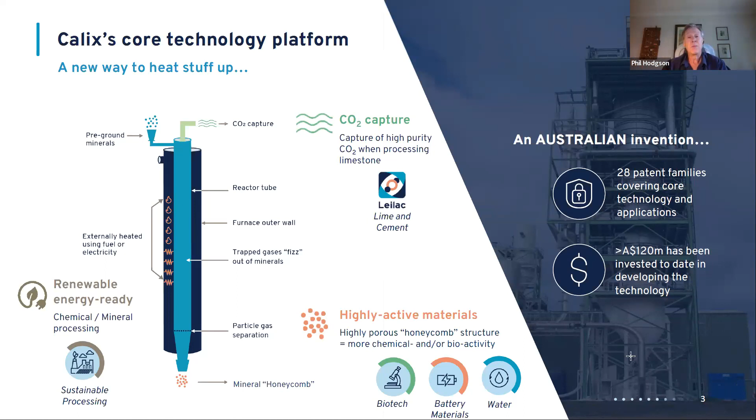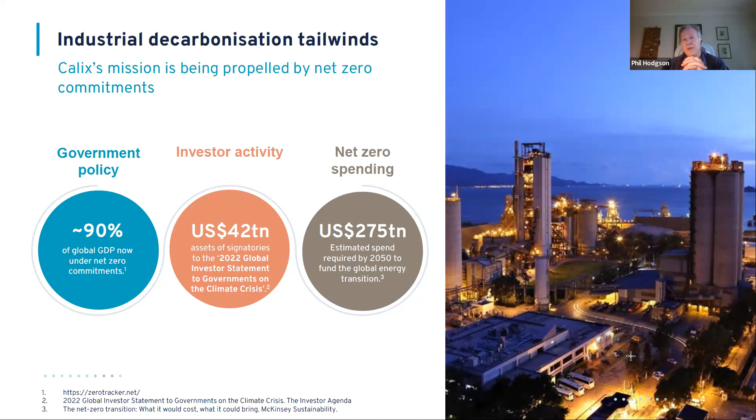And in terms of the applications, all of the ones that we're developing are really powered, if you like, with some pretty strong tailwinds around ESG and industrial decarbonisation. Just a couple of stats here on policy and activity and spending that's needing to go into decarbonisation over the course of the next decades. And they're just staggering sums. And so industrial decarbonisation is a great space to be right now.

If we have a look, just a few jurisdictions as well across Europe and the US and Australia, even in just the very recent announcements a couple of weekends ago, the US-Australia Climate, Critical Minerals and Clean Energy Transformation Compact, which is basically going to allow Australia to be seen as a domestic supplier in the US.

Details still to emerge, but the Inflation Reduction Act is a huge US activity that is giving funding and support to decarbonisation. And the ability of Australia to be under that umbrella is going to open up enormous opportunities here and obviously in the US as well.

Of course, Europe, very important also. Our pilot project in cement and lime is in Europe. They've led the way to some extent with the European Emissions Trading Scheme and what's going to be called the Carbon Border Adjustment Mechanism, where a tariff is effectively placed upon CO2 on products. Again, just another tailwind for a technology like ours.

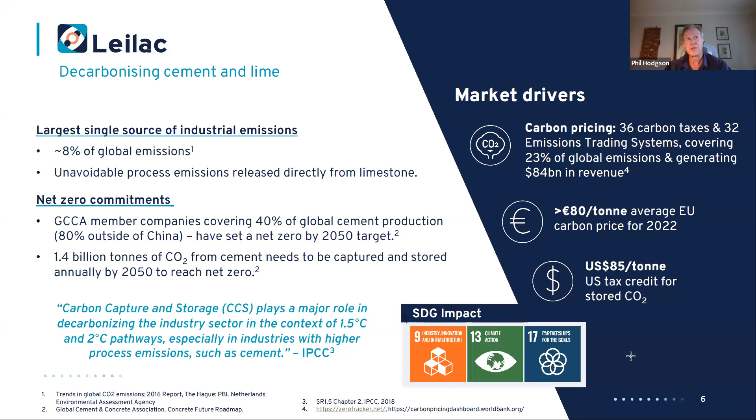I'll jump through to cement and lime first and have a quick chat about our project there. We've already built the largest CO2 separation facility for cement and lime outside of China. We built that in 2019 at a cement plant in Belgium with Heidelberg Materials.

We're in a consortium with quite a few interesting players, not only cement and lime players, but chemical companies like Solvay, energy companies like Engie, and also in CO2 hub major players like Port of Rotterdam, developing one of the largest CO2 hubs in Europe. And so this particular project is very exciting for us.

We're in the process now of LEILAC 2, and I'll give an update at the end of this pack on where we're at with LEILAC 2, but that's targeted to start commissioning in late '24. It's a fourfold scale up of LEILAC 1, so that will take it into being the largest separation technology on a cement plant once that's up and running. That'll be 4 of these tubes, 100,000 tonnes a year of CO2 separation.

And on the far right of this slide, there are quite a few projects in our pipeline, and our pipeline that we updated at the half year had 71 projects all up. Quite a few projects in the pipeline targeting to have LEILAC 3 units, which are suitable for full scale, at their financial investment decision point as LEILAC 2 comes in and proves the technology works at that sort of commercial module scale.

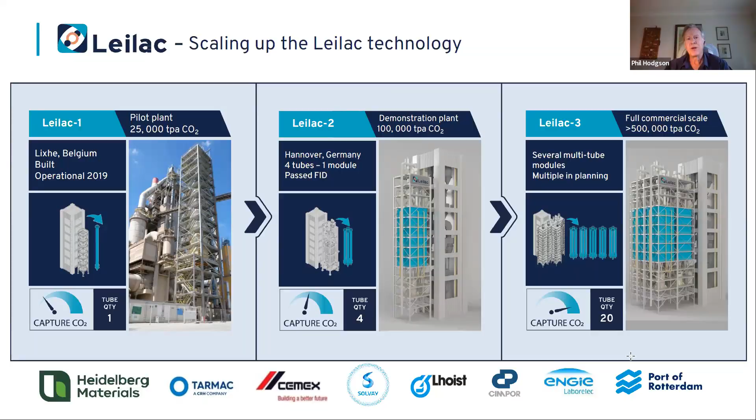And so lots happening on the cement and lime front. And just to give people an idea of the scale, I guess, of the issue facing the cement and lime industry and the scale of the opportunity, this picture is a lovely render that our team's put together of what a full-scale LEILAC would look like, standing right next to its equivalent current technology, which is just a standard cement plant, preheater, pre-calciner tower. So you can see they're much the same scale, much the same size, but ours, of course, capable of separating the CO2 coming out of the limestone.

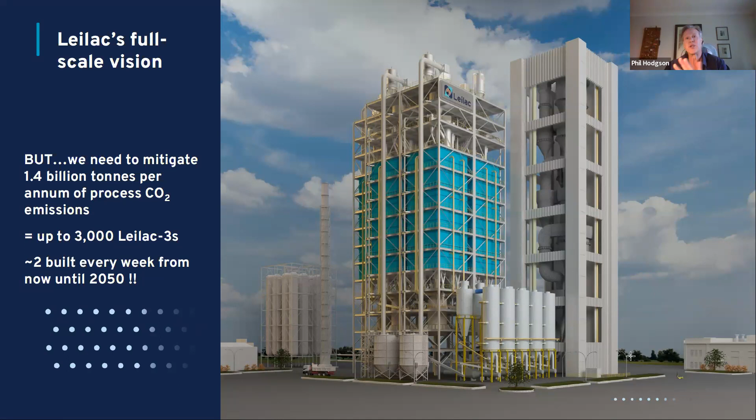We'll need to build 2 of these every week from now to 2050 to solve the CO2 problem for cement and lime. And so it's a massive, obviously, opportunity for us and a massive issue for the cement and lime industries. And all of those policy sort of outlines that I discussed before are pushing cement and lime industries to decarbonise, which puts us in a very nice position. Additional, though, to cement is lime.

Lime is similar. It's obviously come from limestone, but we're developing a technology we announced with Heirloom on what's called direct air capture. And that's where lime produced from one of our kilns, which can separate the CO2, takes the lime, puts it through the Heirloom technology, where it's contacted with air to suck CO2 out of the air. When that CO2 is sucked out of the air back onto the lime, it forms limestone again. And so we then take that back into our kiln to separate that CO2.

This one here is what's called just basically a calcium circuit or calcium carbonate circuit. And we're developing this with Heirloom. We announced this only, I think, in April. We also announced the type of license agreement that's going to cover this, which will be minimum royalty of $3 per tonne of CO2 separated with our technology.

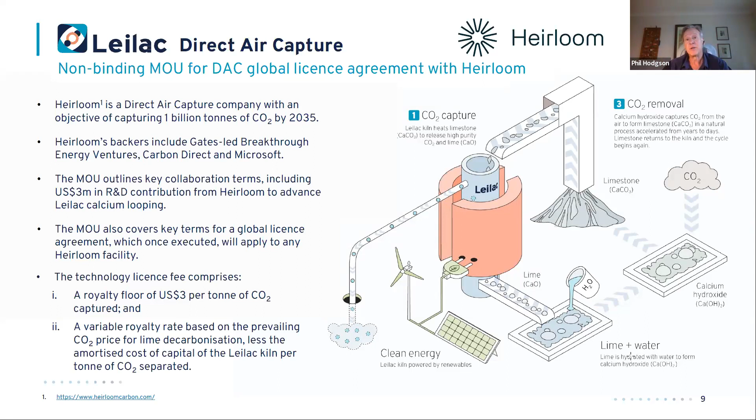Heirloom is Bill Gates backed. They've got some pretty ambitious targets to be separating about 1 billion tonnes a year of CO2 by 2035. If they get a 10th or even 100th of the way there, that's a very significant opportunity for us with this type of license or royalty system in place. We've also achieved in November last year a similar license and royalty arrangement with Heidelberg Materials, and there's a couple of others on foot that again I'll talk about at the end of this pack.

Just moving on to iron and steel now. I think everyone knows how important iron ore is in Australia. It's 44% of our export earnings, and there's a real opportunity if we can use the enormous renewable potential resources we have here in Australia to make a green iron and then export a green iron. And that'll be a 3 to 4 times uplift on the value of just simply iron ore exports.

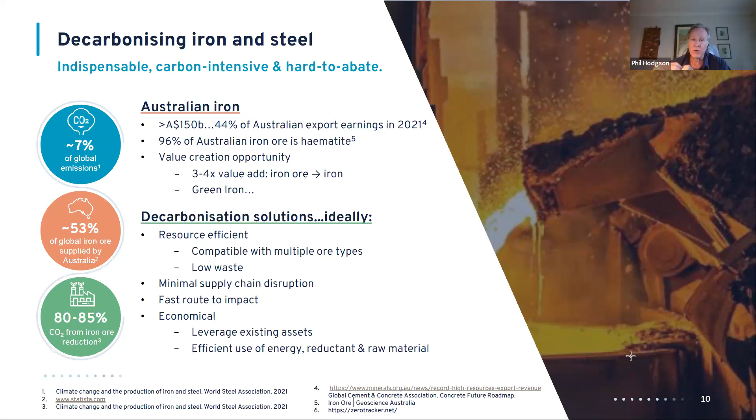We're developing a technology called ZESTY, same core technology, and against all the other technologies that are being developed for iron and steel, we've got some pretty important boxes we tick. One of the key ones is we minimise the use of hydrogen. Hydrogen is the most expensive part of green steel, and we're really targeting to minimise that hydrogen use again, because the hydrogen doesn't escape from our furnace. It's kept separated from how you heat, and we can recycle any unused hydrogen very easily in our technology.

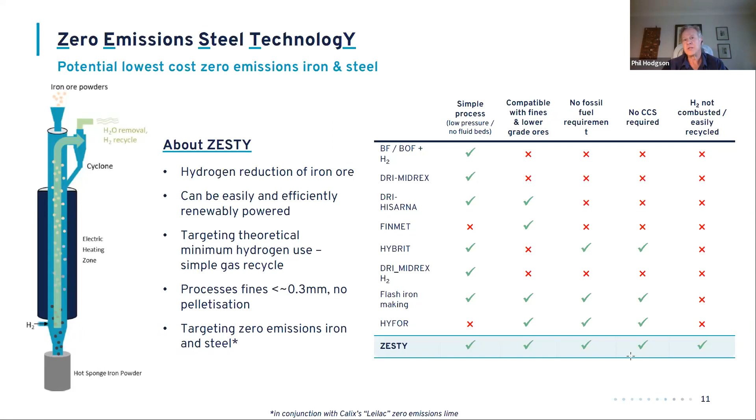And so where we're heading with ZESTY is obviously to develop a solution for the iron ore industry here. And we're also looking at opportunities to have ZESTY units on steel units overseas. Where are we at with that? We're trying to finalise what a 30,000 tonne per annum will look like by the end of this year. We've got some support from ARENA to do that. We're right in the middle of doing some iron ore testing now, and I'll talk a bit about where we're at with that at the end of the pack as well.

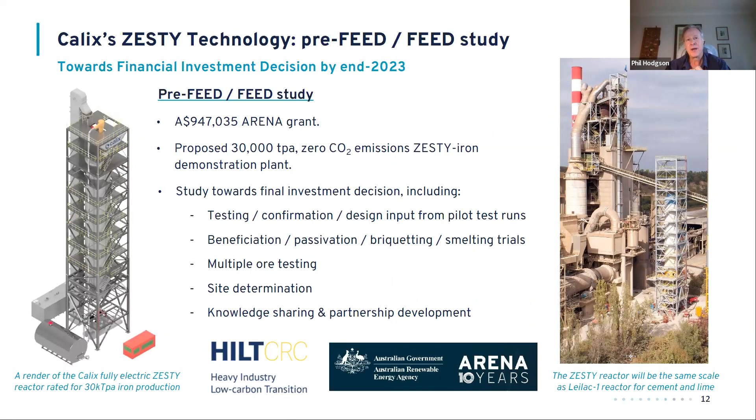So it's a very exciting project to have a look at iron and steel. And similar to cement and lime, there's only ever half a dozen technologies that are ever going to decarbonise those industries, and we've got one technology that can address both. The last little thing I'll touch on is Pilbara Minerals. With Pilbara Minerals, we're developing the technology, as I said, to make a lithium phosphate salt.

That particular project there is fast approaching its final investment decision point. And so with that one there, we'll be a 45% joint owner in a 3,000 tonne per annum lithium phosphate salt facility. I was just in Western Australia last week, actually, and toured the site there, had a good conversation with all the project team and with Dale about this particular project, and both parties are highly enthusiastic to progress. So with this one here, really keen to see this one hit its sort of FID point before the end

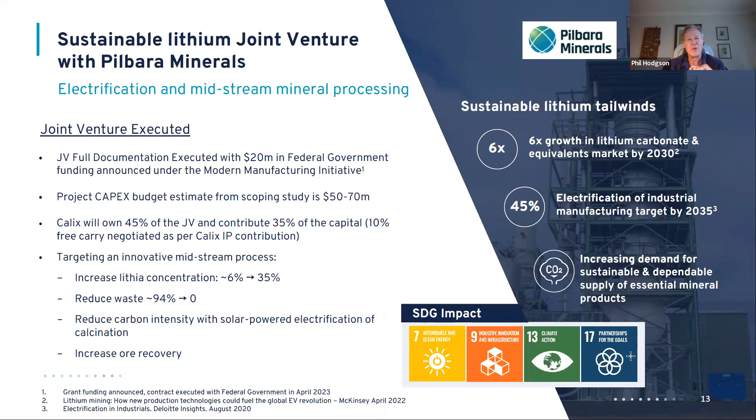I've talked about the Pilbara Minerals joint venture. The final investment decision, both parties are really targeting to get completed by the end of this financial year, so that we can move into the project really quickly and get it planned up and running, starting to get commissioned by late '24. So that one there is highly exciting and is a point of high focus for me.